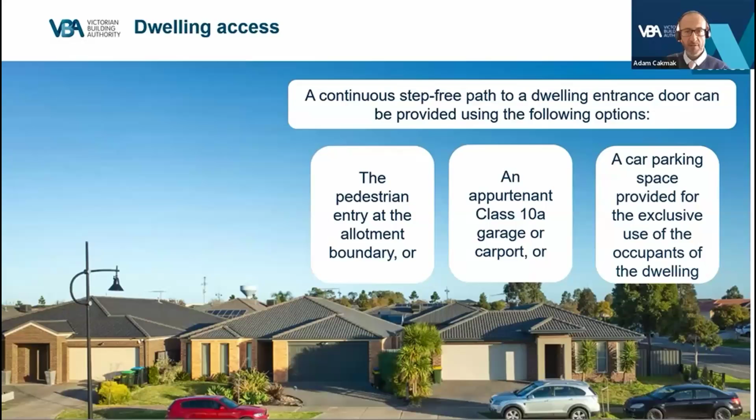Now that our video has covered the application, let's move on to the specific requirements relating to dwelling access. To reiterate, the standard requires a continuous step-free access path to the dwelling entrance. That includes from the pedestrian entry at the allotment boundary, or an appurtenant Class 10A garage or carport, or a car parking space provided for the exclusive use of the occupants of the dwelling. At least one level and step-free entrance door into the dwelling from the access path must be provided.

Let's move on to the pathway to entrance doorway. Here's an example shown on the screen. The requirements that apply to a dwelling entrance doorway, in summary, must be as follows: it must have no steps, it must have a maximum gradient of 1 in 14 in the direction of travel, it must have a minimum width of 1 meter, and the allocated pathway must connect to a dwelling entrance door.

Alternatively, the pathway can be provided directly from the garage via an entrance door, or from the carport to the dwelling entrance door, or from the designated car parking space. It should be remembered that any gates provided on the access pathway must have a clear opening of 820 millimeters.

Where an access path incorporates a section that's elevated or suspended above the finished ground, the dead and live load requirements must meet the structural provisions of Australian Standard 1170 Part 1. In summary, the key principle for outside the dwelling is to have an easy access path to the dwelling entrance door.

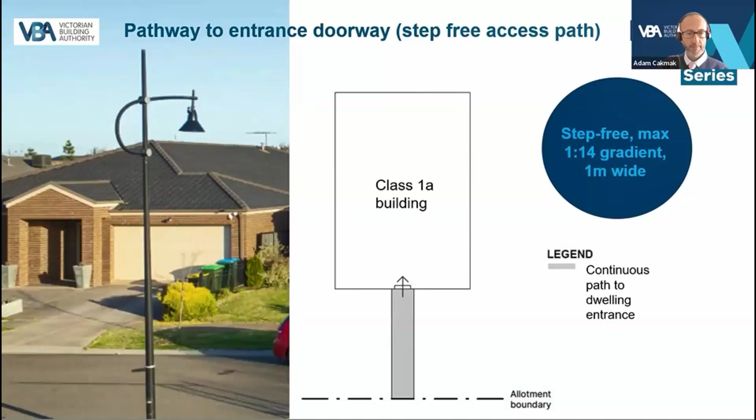Moving on to the requirements for a step-free access path from the garage or carport or a car parking space for the exclusive use of the occupants. These alternatives require a step-free access path, which must have the following: a connection between the dwelling entrance door and the car parking space, it must be step-free, and it must be a minimum of 1 meter wide.

It must have a crossfall of 1 in 40 or shallower. Similar to before, if any gates are located on the access path, those gates must have a minimum clear opening width of 820 mm.

Just an alert for everyone in regard to the use of the garage as the direct access path. It should be noted where the space required for step-free access intrudes into the minimum required space for car parking under the siting provisions, a report and consent may be required under the building regulations. Please refer specifically to Regulation 78 when assessing or designing the garage option.

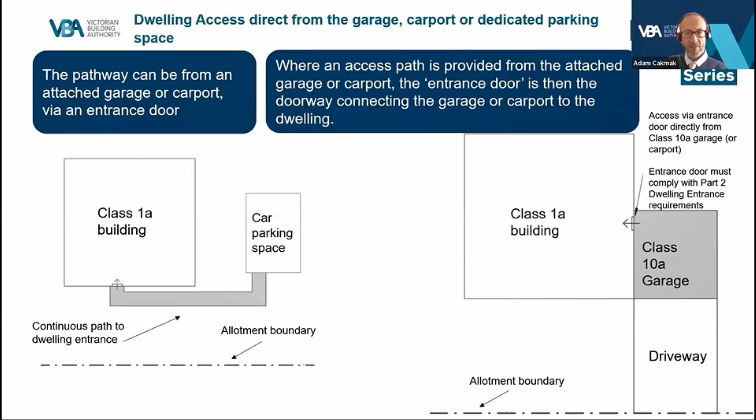Moving on to further design examples. Where a path shallower or equal to 1 in 20 cannot be used, and in instances where one or more ramps is necessary, the ramps must comply with the following requirements. Firstly, the interval between landings must not be more than 9 meters for a 1 in 14 gradient, or 15 meters in length for a 1 in 20 gradient. The other way to measure it would be by length determined by a linear interpolation for ramps with a gradient between 1 in 14 and 1 in 20.

Secondly, the minimum width of the ramp must be maintained at 1 meter between any handrails or curbs if provided at each side of the ramp. Thirdly, at each end of the ramp, there must be a landing that is not less than 1200 millimeters long and at least as wide as the ramp to which it connects. It must be level or have a gradient not more than 1 in 40 if a gradient is necessary for drainage.

In this application, it should be noted that a landing area, if provided at the dwelling entry, can count as a landing for the purposes of the ramp.

Lastly, where a single step ramp is used, the step ramp must have a height of not more than 190 millimeters and a gradient not more than 1 in 10, and have a width of at least 1 meter or equivalent to that of the access path, whichever is the greater, and a maximum length of 1900 millimeters.

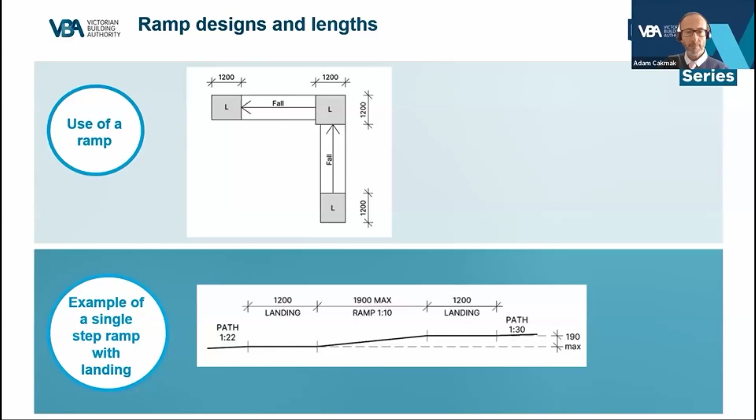It should be remembered that the standard stipulates that the start of the access ramp is the allotment boundary, and not the public footpath. The public footpath cannot be used as a landing.

In addition, it should be remembered that the use of decks and boardwalk style paths needs to comply with AS 1170, AS 1684, and or any applicable NASH standard that relates to residential and low-rise steel framing.

A further point of guidance to be remembered is that Part 1 of the ABCB standard for livable housing design requires a step-free access path from a parking space or property boundary to the dwelling entry door for a Class 1a dwelling. However, for Class 2 buildings, it should be remembered that NCC Volume 1 Part D4 access for people with a disability is applicable instead of the livable housing design standard.

Therefore, it is not necessary to apply Part 1 of the livable housing design to a Class 2 building, as Part D4 and the appropriate Australian standard, in this case being AS 1428, address the accessibility requirements. This means that practitioners need to ensure the differing requirements are applied to Class 2 buildings.

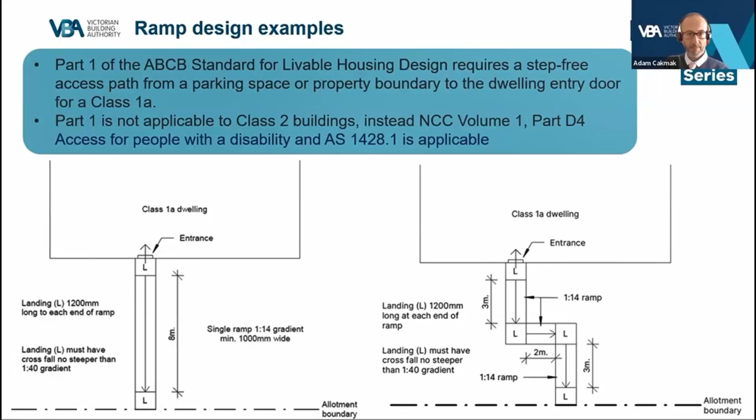Here's another example for the use of a dedicated car parking space with an access path. This alternative allows for one or more car parking spaces to be connected to or from part of a required access path to at least one of the car parking spaces.

One of these car parking spaces must have a minimum unobstructed car parking space of 3.2 meters wide by 5.4 meters long, and have a gradient of not more than 1 in 33 for bitumen or 1 in 40 for any other surface material.

This applies only when the appurtenant garage, carport, or car parking space is connected to or forms part of a required access path. Where the step-free access path is provided from an appurtenant garage or carport, access into the dwelling must be via a door complying with the entrance requirements, which are discussed in Part 2 of the Livable Design Standard.

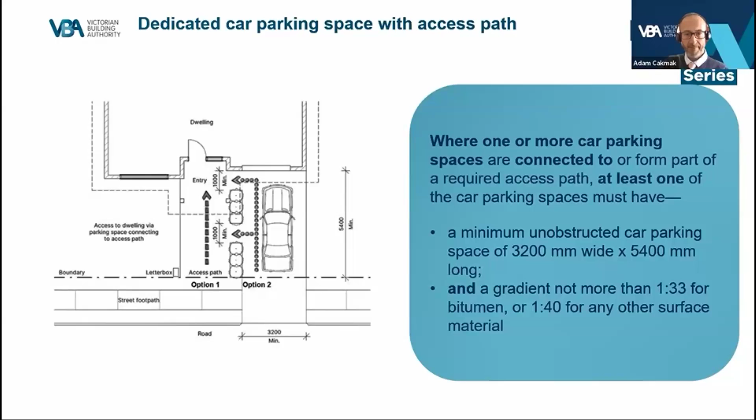It should be noted in regard to the entry requirements that for instances where access ramps are required next to the external wall of the building, practitioners should be mindful that the ramp must be constructed with a 25mm separation from the building to meet the termite management visual inspection zone requirements.

This is only applicable to buildings identified as requiring termite management. Please note, however, that this gap can be reduced provided at the point where the ramp crosses the perimeter termite management system, the system is altered to form a slab joint as specified by clause 6.3.4 of Australian Standard 3660 Part 1.

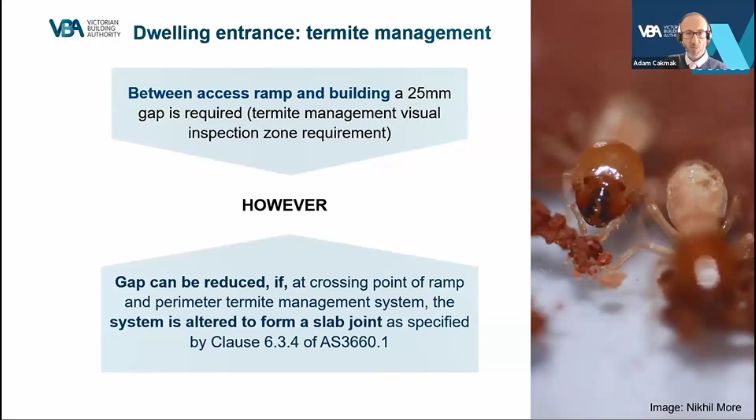Okay, there's been a lot of information that I've gone through there. Let's pause for a moment and go have a quick quiz.

So the first question is, does the standard apply to all parts of a Class 2 building? Is that true or false?

The second question relates to whether a continuous step-free path to a dwelling entrance door can only be provided from the pedestrian entry at the allotment boundary.

And the third question applies to where a single step ramp is used. The step ramp must have a height of not more than 190mm, a gradient not more than 1 in 10, and a width of at least 1 meter or equivalent to that of the access path, whichever is the greater, and a maximum length of 1.9 meters.

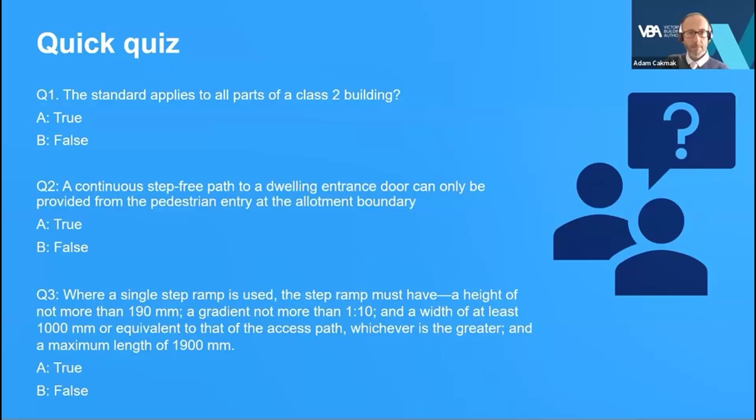For all those that answered the questions, the answer to question 1 is that the standard only applies to the internal parts of a Class 2 building.

As mentioned previously, NCC Volume 1 must be applied, and Volume 1 has differing requirements to that of the Livable Housing Design Standard. Question 2 discussed whether a step-free path to a dwelling entrance door has to be provided from a pedestrian entry at the allotment boundary.

The answer to that is it's false. It can also be provided from an appurtenant Class 10A garage or carport or a car parking space provided for

And lastly, the third question in regard to a single step ramp and whether it can be used, the answer was yes, it can be, as long as those requirements are met.

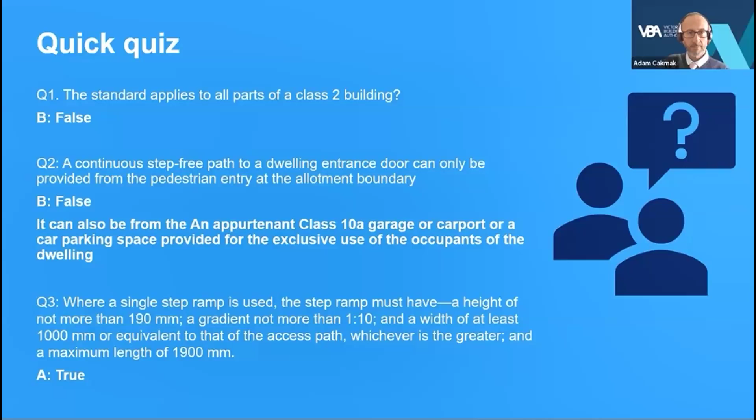Let's move on to discussing the specific exemptions that apply to a Class 1 dwelling and the required access requirements.

These exemptions can be found under Performance Requirement H8P1 and clauses H8D2, subclause 2A and B of Volume 2 of the BCA.

When step-free access from an appurtenant garage, carport, or car parking space is not provided, clause 1.1 of the standard for step-free access need not be complied with if one or more of the following apply.

The first exemption relates to whether the area for the access path is too steep, and the second exemption applies to whether there is actually insufficient space on the allotment.

When access via an appurtenant garage, carport, or car parking space is not provided, NCC Volume 2, Clause H8D2, Subclause 2A sets a prerequisite for applying any one or more of the exemption conditions. The clause indicates you cannot apply an exemption unless you can establish that step-free access is not provided from an appurtenant garage, carport, or car parking space.

Some examples that allow for this are that there's no garage, carport, or car parking space proposed on the allotment site, or the garage, carport, or car parking space is on a different floor level to the rest of the dwelling, or the garage, carport, or car parking space is shared with another dwelling or building and so is not provided for the exclusive use of the occupants of the dwelling.

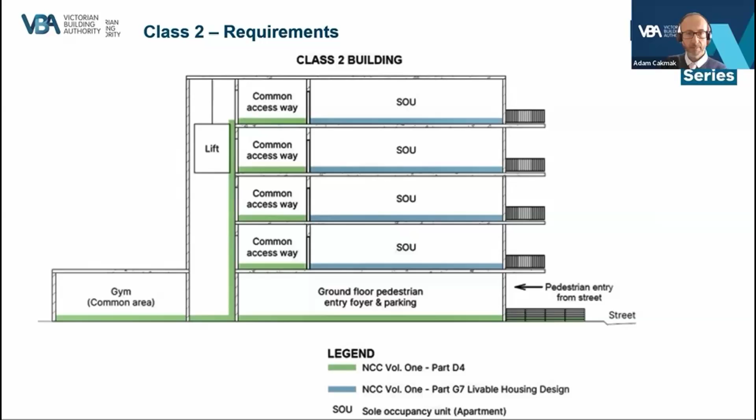Let's move on to the dwelling entrance door requirements. So firstly, the first requirement relates to having at least one entrance door to the dwelling, which must be a minimum 820 millimeters clear. The entrance door threshold must be level or have a max sill height of 5 millimeters or have a ramped threshold that does not extend beyond the depth of the door jamb. It must also have a gradient not steeper than 1 in 8, and it must be at least as wide as the minimum clear opening of the entrance door. It must also not intrude into the minimum dimensions of the required landing area.

Lastly, the required entrance door must have a space of at least 1200 millimeters by 1200 millimeters on the arrival side. Please note, however, the landing space is not required if the entrance door is through an appurtenant garage or carport directly into the dwelling.

Just to summarize, an 820 minimum clear opening is required, a step-free door threshold, a 1200 by 1200 clear space. In addition, the entrance area must be weatherproofed.

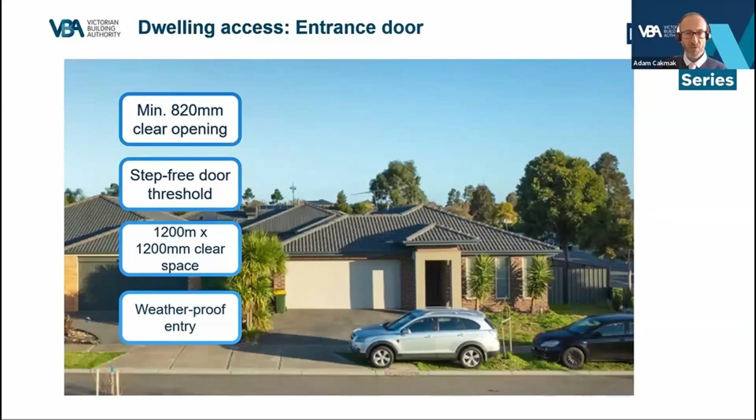Now, based on the last requirement for weatherproofing, let's talk about how the NCC requirements cross over to the livable housing design requirements. It should be noted that where an external step-free level entrance is provided, there are other certain NCC provisions which we'll talk about.

For instance, the weatherproofing provisions must still be achieved where an impermeable surface such as hardscaping is provided at the entry. This would require a channel drain across the entire length of the opening, for instance. Please note that this drain must be appropriately sized and designed to comply with the plumbing and stormwater drainage requirements of AS 3500 Part 3, or alternatively be designed in accordance with the drainage provisions applicable by NCC Volume 2, deemed to satisfy Clause H2D2.

In addition, depending on how the dwelling access is provided, please note that the weatherproofing provisions do not apply to an entrance door that is provided through an interconnected garage directly to the dwelling.

Lastly, to discuss the Livable Housing Design Standard, it does provide an alternative option to satisfy the weatherproofing requirements, and this is through the provision of a roof covering which must be 1200 millimeters by 1200 millimeters and a landing area that is level or has a fall not greater than 1 in 40 at the entry. Please note, however, when using this option, that any posts or columns that support the roof covering to this area, those posts and columns must not encroach into the minimum 1200 by 1200 millimeter landing area required in front of the entrance door.

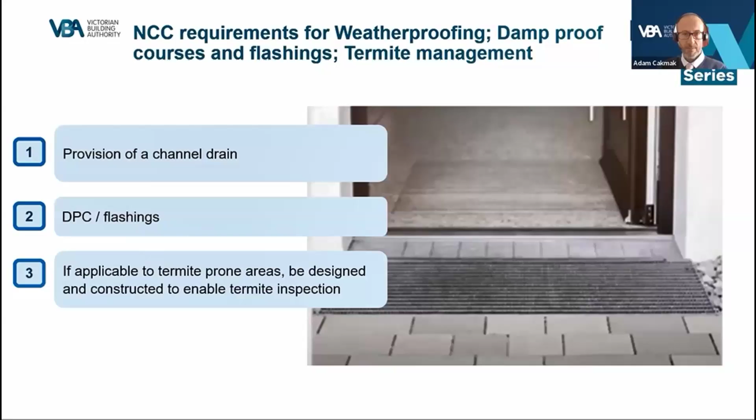Moving on to the termite management requirements and the specific requirements that relate to the standard.

As mentioned previously, for sites identified as requiring termite risk management, and in addition to having a level threshold for the entry access ramp or path required by the Livable Housing Design Standard, those sites that require termite risk management must check whether termites have breached the gap. The applicable Australian Standard AS 3660 Part 1 requires a 25 millimeter inspection gap to allow for clear visual inspection.

This method can generally be used when the level entry is protected by a roof over the entry porch, for instance, and this gap can be covered by a removable plate or alternatively integrated into the drainage channel to allow compliance if used with a channel drain, as previously shown.

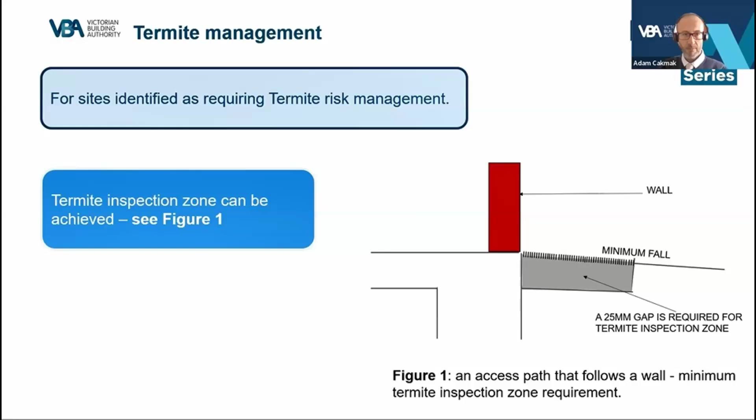For those who would like to find out about other solutions to termite management in cases where there is no step up into the dwelling, please refer to Australian Standard 3660 Part 1 and the clauses shown on screen: 2.2, 2.3, 4.4, and 6.5. They provide for specific construction methods.

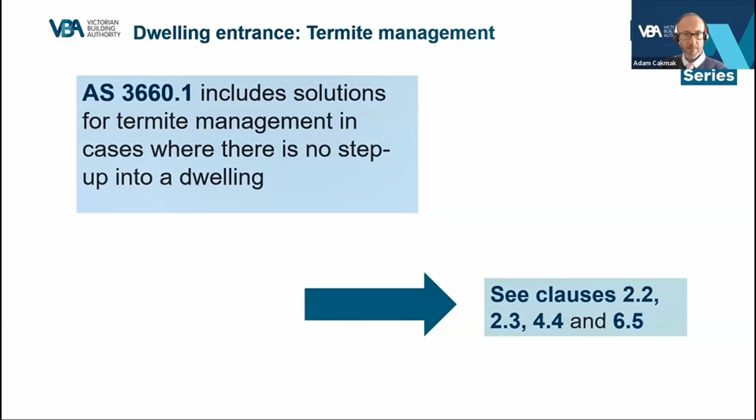Now let's move on to our next section, which relates to the inside of the dwelling. We'll start with the clear opening width requirements and then the applicable threshold requirements.

Firstly, let's start with the internal doors, which must have a clear opening width of 820 mm, as shown on the screen. Please note this only applies to a doorway that connects to or is in the path of travel to: the habitable room or laundry on the ground or entry level; the attached Class 10A garage or carport that forms part of an access path; and any sanitary compartment that is required and subject to the provisions on the ground or entry level.

In addition, where the threshold of an internal door subject to the provisions is provided, that threshold must be level or have a maximum 5 millimeter lip that is rounded, or alternatively have a ramped threshold that does not extend beyond the depth of the door jamb and have a gradient not steeper than 1 in 8, and lastly, be at least as wide as the minimum clear opening width of the doorway it serves.

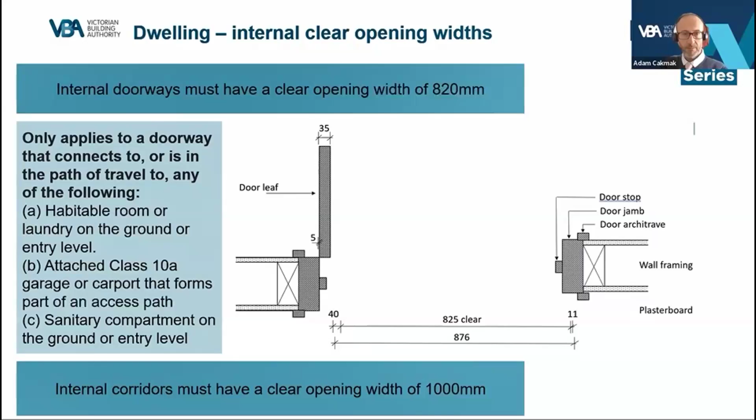Let's now have a look at the threshold example applicable to an internal doorway. The threshold, as mentioned, must be level, have a height no more than 5 millimeters if the lip is rounded or beveled, or be ramped within the depth of the door frame and have a gradient not more than 1 in 8.

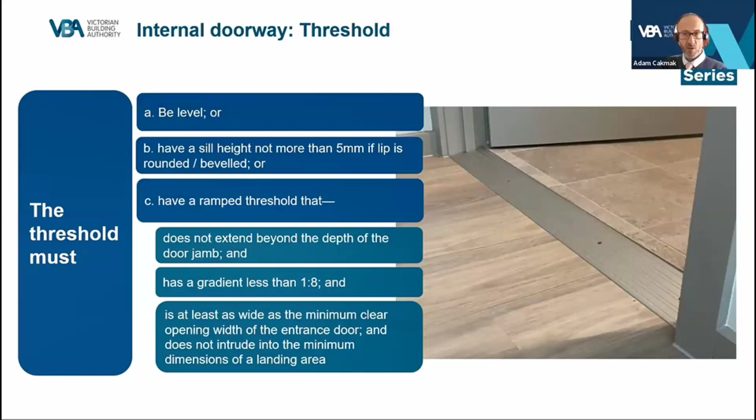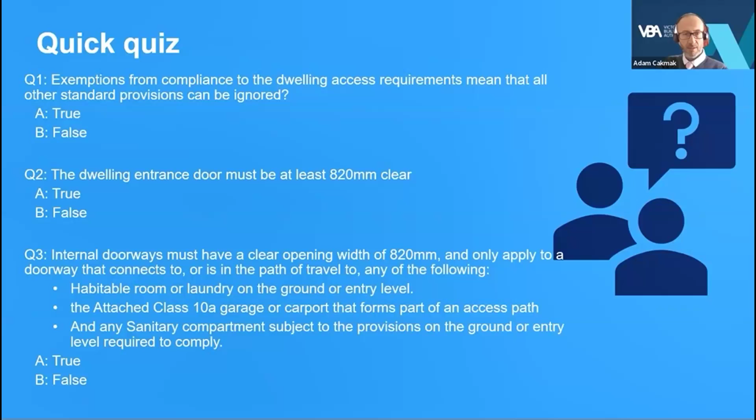Let's move on to our second quiz. The first question relates to whether the exemptions from compliance to the dwelling access means that all other standard provisions can be ignored. The second question relates to whether the dwelling entrance door must be at least 820 millimeters clear. And the third question relates to internal doorways, which must have an opening clear width of 820 mil, and that only applies to a doorway that connects to or is in the path of travel to any of the following examples.

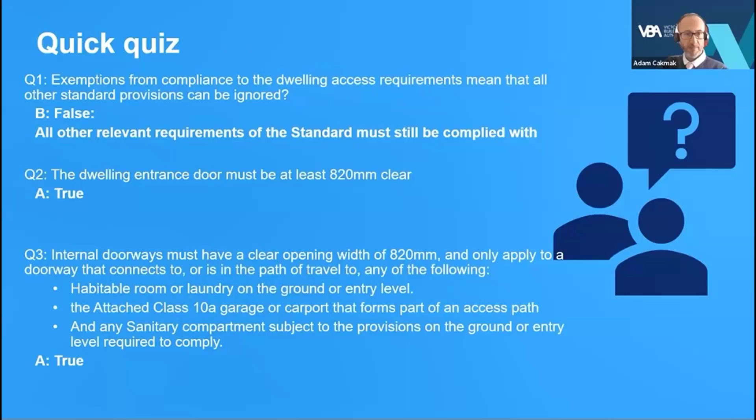So the answer to the first question was false. All other standard requirements must still be complied with. The answer to the second question was true. And the answer to the third question was also true. So well done to all those that got that correct.

Moving on to the sanitary compartments and the requirements. The first requirement is that there must be at least one sanitary compartment located on the ground or entry level of a dwelling. The term sanitary compartment refers to a room or space containing a toilet. It applies equally to any type of room or space containing a toilet, such as a bathroom, ensuite, powder room, or other separate room. A sanitary compartment subject to the standard must be constructed in accordance with the following.

Firstly, a toilet pan located in a separate sanitary compartment must have a clear width of not less than 900 millimeters between the finished surfaces of opposing walls either side of a toilet pan. For a room containing a toilet pan, any fixed obstruction such as a basin or a vanity unit must be located at least 450 millimeters from the center line of the toilet pan, measured from the front face of the cistern. And thirdly, in addition to the clear minimum circulation space of 1200 millimeters by 900 millimeters, this must be provided from the front edge of the toilet pan.

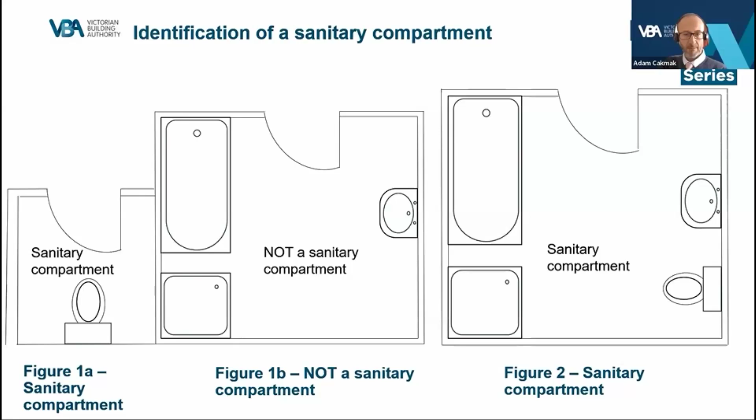In regard to the toilet pan requirements, as shown here, it should be noted that where the required minimum circulation space of 1200 millimeters by 900 millimeter wide clear space is provided in front of the toilet pan, this also applies for both a separate sanitary compartment and for a sanitary compartment that is combined with a bathroom. As mentioned, the minimum circulation space must be clear of the door swing, and it also applies regardless of whether the door is inward opening or outward swinging or is a cavity slider.

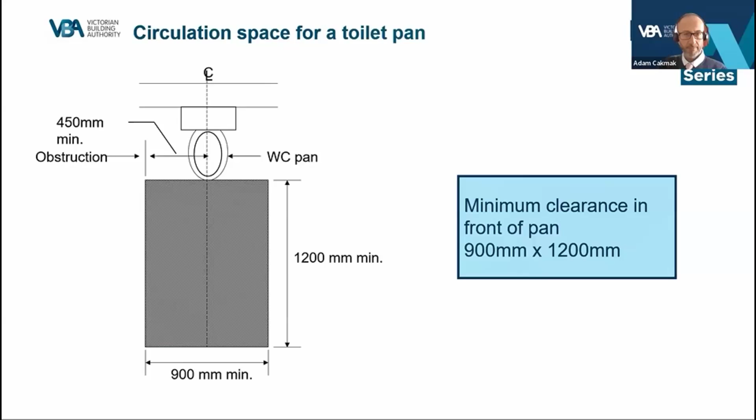Here is another example, this time of a bathroom layout that includes the toilet pan. This is also required to meet the same requirements of the standard. The key requirement, once again, is a clear zone of 900 by 1200 immediately in front of the front edge of the toilet pan, as shown by this slide.

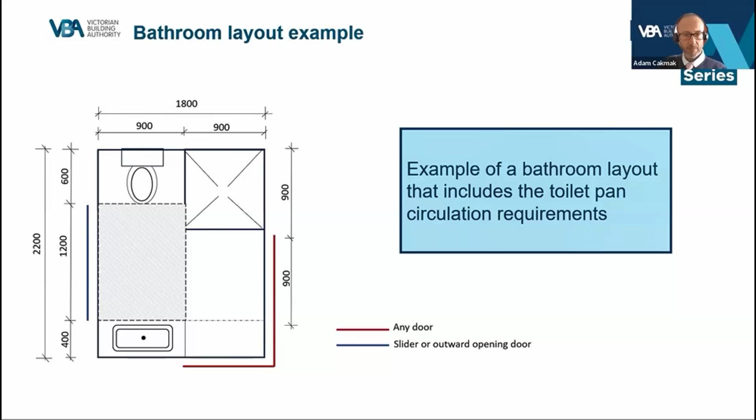Now let's move on to discussing the requirements to showers. It should be remembered that at least one shower must comply with the standard, and this means that in a dwelling with 2 or more showers, only one of those showers needs to comply with the requirements. However, having said that, please note that a shower subject to the standard need not be located on the ground or entry level of the dwelling. Please also remember that there is no minimum shower size or minimum clear opening requirement, and the room to the shower must have a minimum door width and must also achieve the threshold requirements regardless.

To achieve the requirements, the standard requires the shower to be hobless and to also have a step-free entry and a lip no more than 5 millimeters in height. This requirement is important as it also relates to the National Construction Code provision for a shower to have a lip not more than 5 millimeters in height for a required water stop angle. This is required to meet the objectives of deemed to satisfy clause H4D2.

In addition, please note that compliance with Australian Standard 3740, the standard for waterproofing of domestic wet areas, or Part 10.2 of the housing provisions can satisfy the overarching performance requirements as stipulated for wet areas under H4P1 of the NCC.

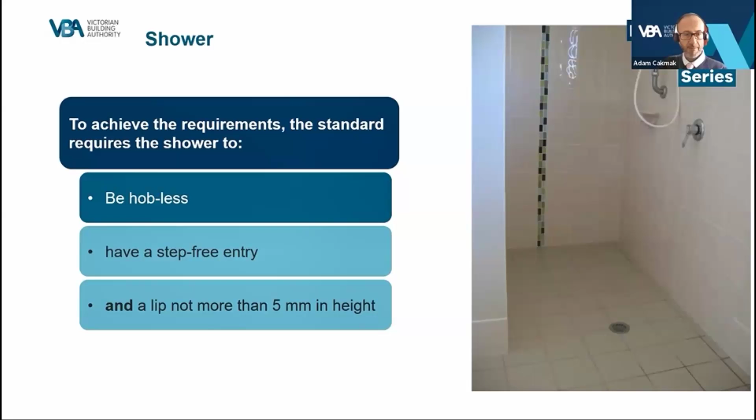Moving on to Part 6 of the standard, which specifies the requirements for the reinforcement of bathroom and sanitary compartment walls. The intent of these requirements is to ensure that certain walls adjacent to a shower, a toilet, and in some cases a bath can support the future installation of grab rails.

Please note that the requirements for reinforcement are provided by the respective NCC governing requirements, which are firstly located within the performance requirements of H8P1 subclause F for volume 2 and G7P1 for volume 1. The deemed to satisfy provisions of H8D2 of volume 2 and G7D2 of volume 1. And in addition, please also refer to the specific construction requirements provided in Part 6 of the Livable Design Standard.

Let's watch a small animation video outlining some of those key reinforcement requirements.

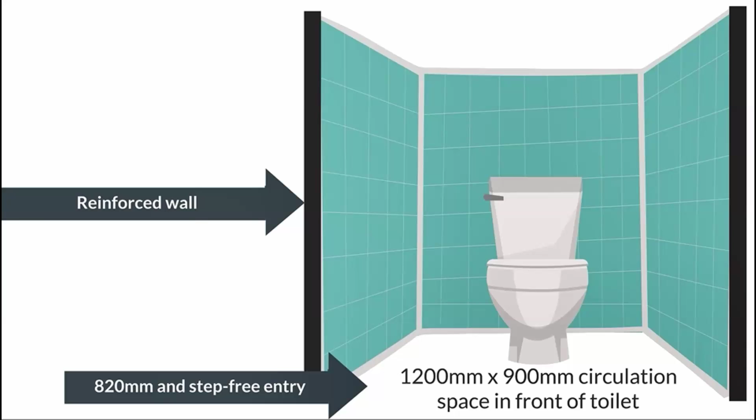Sanitary compartments. A sanitary compartment must be provided at the ground or entry level. It must have a reinforced wall, and the entry must be 820 millimeters and step-free. There must also be a 1,200 millimeters by 900 millimeters circulation space in front of the toilet.

That video just provides a summary of the requirements. Please note, however, that wall reinforcement is not required if the walls are constructed of concrete, masonry, or other similar material which is capable of supporting a grab rail.

It must be noted that Part 6 reinforcement also only applies to sanitary compartments or bathrooms subject to the requirements of the design standard. For instance, the requirement for a sanitary compartment located on the ground level and the requirements related for a shower. It should also be remembered that if there is no requirement to install the actual grab rail, the reinforcement refers only to the noggings or sheeting, for instance.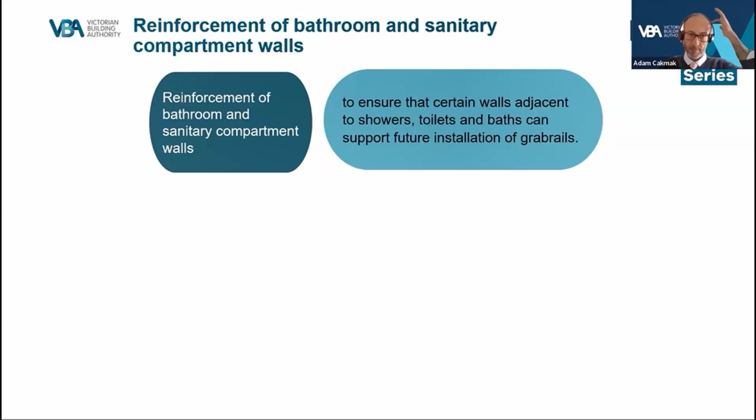This means that a bath with one adjoining wall only requires reinforcement to the one adjoining available wall, for instance. Please note that, in addition, any freestanding baths that are proposed are excluded from the standard. There is also no maximum or minimum dimension for the freestanding bath specified within the standard for a distance from the wall. Now let's move on to the reinforcement requirements around toilets.

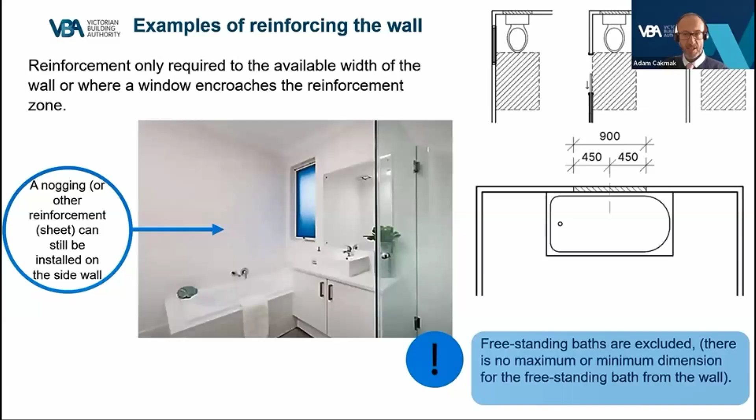Let's take a look at this short video for an overview. Reinforcement of bathroom and sanitary compartment walls.

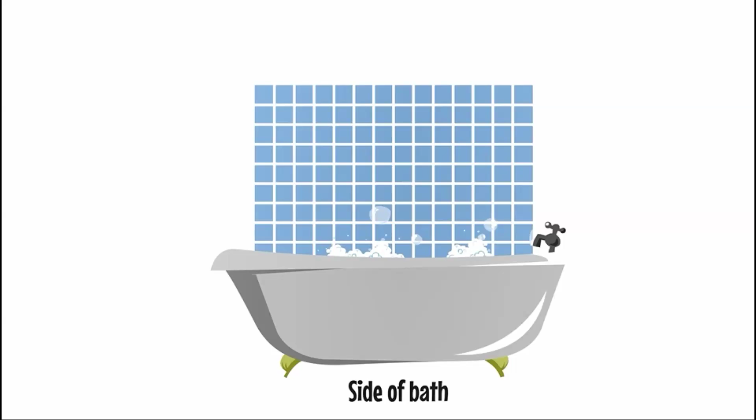Reinforcement can either be sheeting reinforcement or timber noggings. Sheeting reinforcement: here is a side view of a bath. If sheeting wall reinforcement is used, wall reinforcement construction must be minimum 12 mm thick structural grade plywood.

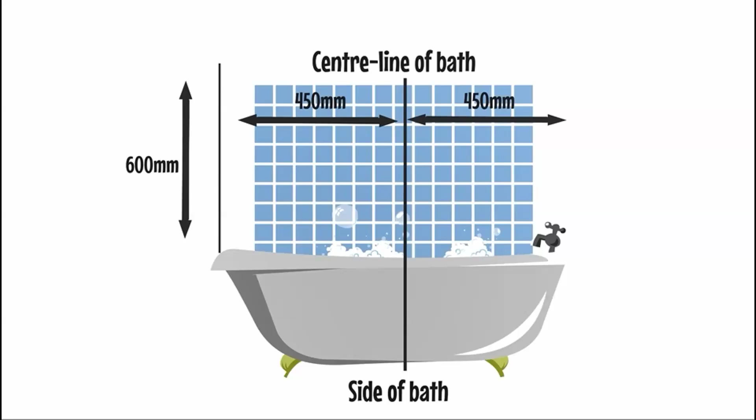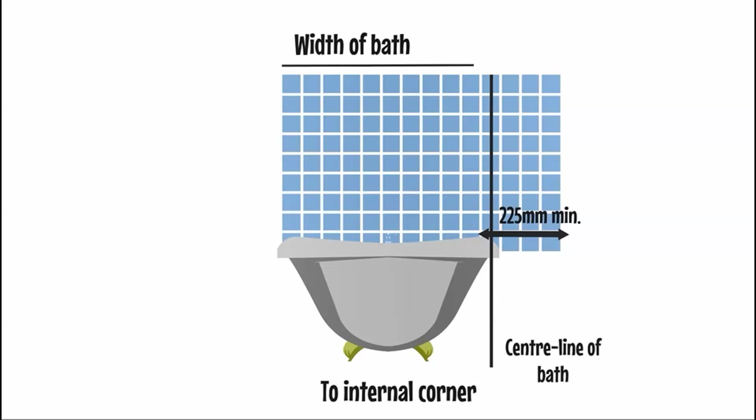There must be a minimum of 450 mm of reinforcement horizontally from either side of the center line of the bath, as well as 600 mm of reinforcement vertically from the top of the bath. Here is a view of the bath to the internal corner. There must be a minimum of reinforcement of 225 mm extending horizontally beyond the width of the bath, as well as 600 mm extending vertically from the top of the bath.

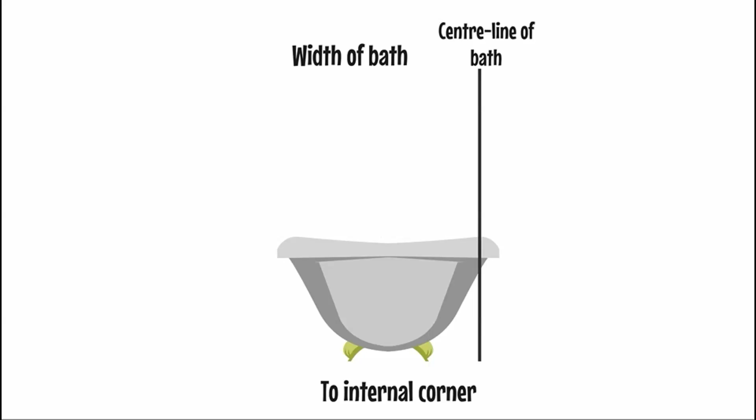Timber nogging reinforcement. Here is a view of the bath to the internal corner again. Timber noggings must be a minimum of 25 mm thick and 150 mm wide. The bottom edge of the nogging must be 600 mm above ground level. The top edge of the nogging must be 1,600 mm above ground level.

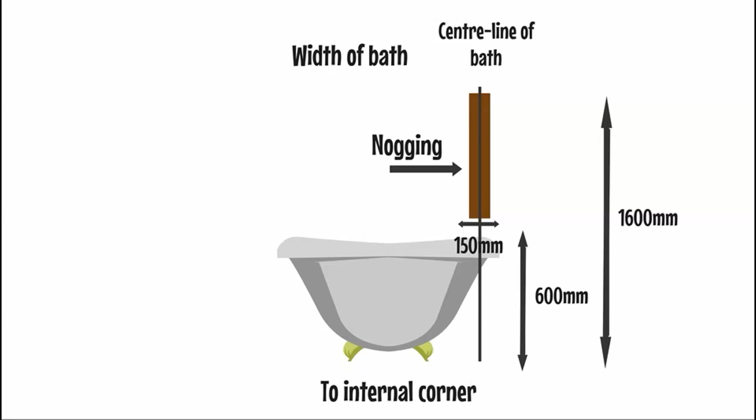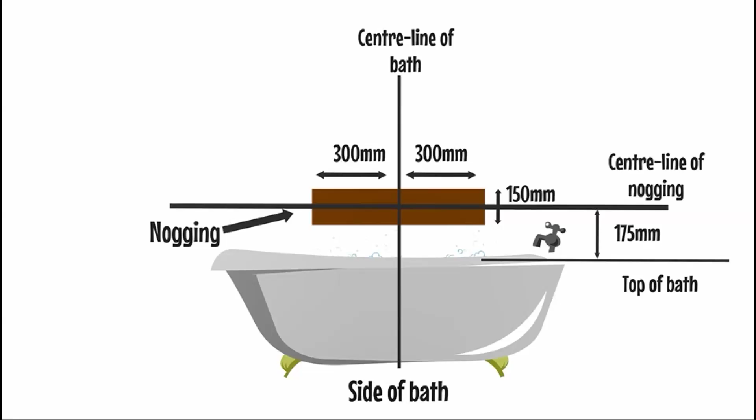Here's the side view of the bath again, and the nogging. The nogging must be 150 mm wide, and there must be 300 mm of nogging extending horizontally from the center line of the bath. Here is the center line of the nogging, and here's the top of the bath. There must be 175 mm between the top of the bath and the center line of the nogging.

Moving on to our third and final quiz to recap our section. Question 1 relates to whether a clear minimum circulation space of 1200 mm by 900 mm must be provided from the front edge of the toilet pan - true or false? The second question relates to wall reinforcement and whether or not it's required if the walls are constructed of concrete, masonry, or other material capable of supporting a grab rail.

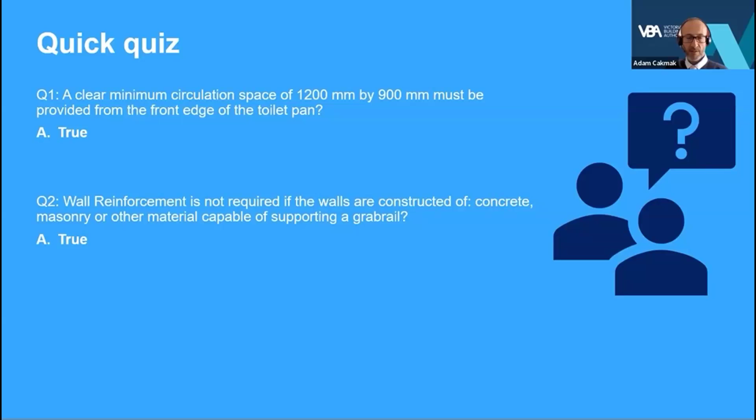Thank you for all of those that have answered. The answer to question 1 is yes, that is true. And the answer to question number 2 is also true. Very well done to those who got that right.

Well done, as mentioned, for all those that answered those questions correctly in each quiz. To conclude, in this webinar session, we've looked at various applications and examples in how to achieve compliance with the Livable Design Standard. In summary, we hope that we've helped you to obtain a better understanding of the various provisions of the standard.